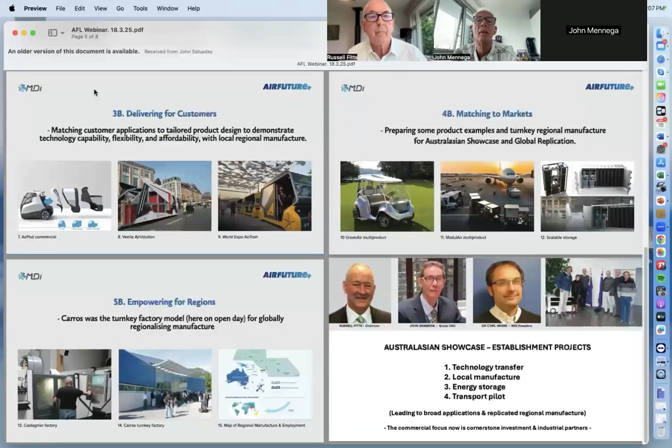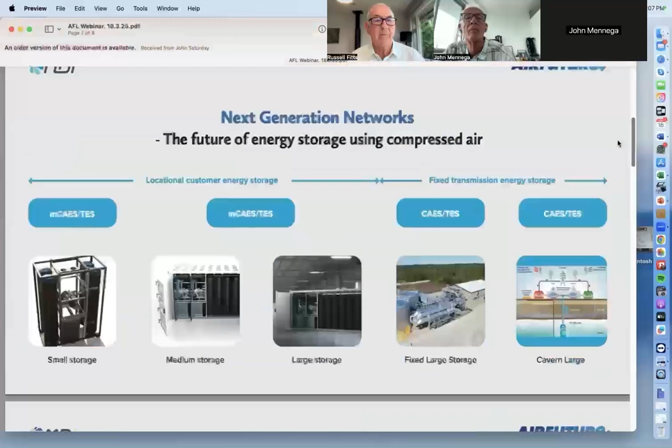Hi, everybody. Hold on, John, I'll just sort out the technology here. You've got a fair bit of echo now. What about if I turn the volume down a bit? At the moment, I've got all your slides up on one screen, which we do not want. Sorry, everybody, we'll be with you in a moment. I can start to talk anyway, Russell, while you're sorting that out. We're on slide 1. All good? We all good? Yep.

Everybody's experienced along the development gestation process with MDI, but I want to point out to you that the development has actually followed a very logical path, and explain a little bit to you why. Can you go back a slide, Russell? Explain to you why it's taken so long, back to the orange slide. Why it's taken so long, why we're now ready, and for further field development.

Some of you might recognise this slide as being the front page of the website. If you look up the top there, you'll see documents, fourth from the right. If you go to that over the course of the next week, you'll find copies of everything we're talking about, including the slides, the flyer, and the main document. Those documents differ to the others because they're focused on commercialisation.

Now, when we say on the website we're a universal alternative to batteries, we're not kidding. Batteries have a number of issues, including cost, safety, they degrade and they're not clean. But the primary issue about batteries that a lot of people don't realise is that they're shorter duration and they don't have high capacity, which means that if you spend $100 million on a 100 megawatt battery, it's probably got about 4 hours of scope, or its catchment area.

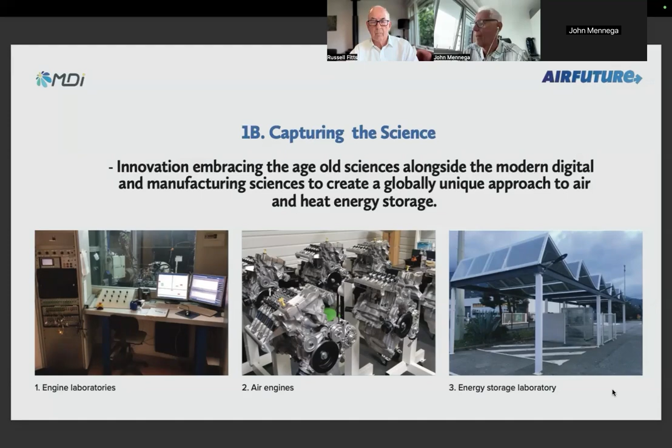And they did this via their laboratories in France. And it took a long time, and they worked along with Tata and others, etc. And you can see the engine laboratories on the left, all the different engines they were able to create, and the storage lab on the right-hand side. And that was the beginning of MDI, where they laid the platform for the next stage, and the next stage was product. Next slide, please, Russell.

And here MDI was able to evolve the technology that they had developed with the modularity, in other words, how you can make it bigger or smaller and still do exactly the same thing for the customers and the users. And also they created something which is totally unique to the energy industry. Within the one system, and a battery is an example of a system, they were able to separate out the capacity and the size to the actual storage and the energy generation. For any technical people within the audience, that's the difference between kilowatts and kilowatt hours. In other words, how much energy you store versus how you deliver that energy are completely able to be separated.

And that has enormous impact for being able to address all the different areas within the grid. And they're able to control all of that through the air valve system of the energy tanks. Now, bearing in mind that those tanks can be put underground a little bit like in the old fossil fuel service days, or current days still, the ecology of the system and the attractiveness of the system, let alone the scale of the system, is something that we really refer to as next generation.

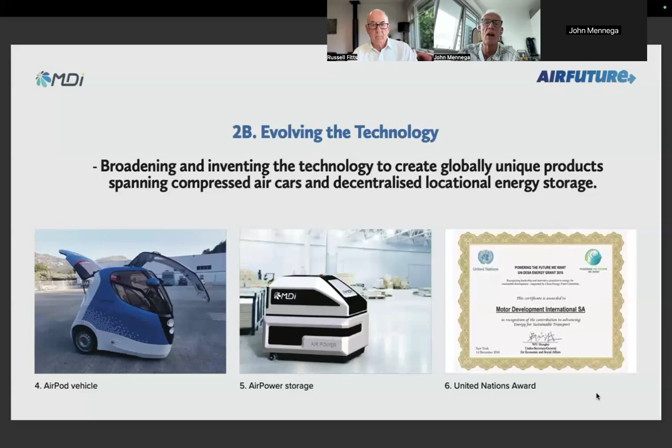It's one thing to develop the science and capture it as your platform technology. It's another thing to then produce products, and another thing again to deliver products for customers. This was the next stage of MDI.

Bearing in mind, while this is taking place, the years are ticking over because this takes a long, long time to do. The middle company there, Veolia, the huge European waste company that's all around the world, became a customer of theirs for that particular unit that you can see on the screen, which is still on the streets. What stage is it at? It now needs larger engines.

This is a step that we will be doing in early stages of the commercialisation. On the right-hand side, you see what became the very famous World Expo air train, which is the MDI train that was produced and commissioned by the World Expo to run their people around the Dubai World Expo. On the left-hand side is a complete contrast, showing how the AirPod is able to be adapted for commercial applications.

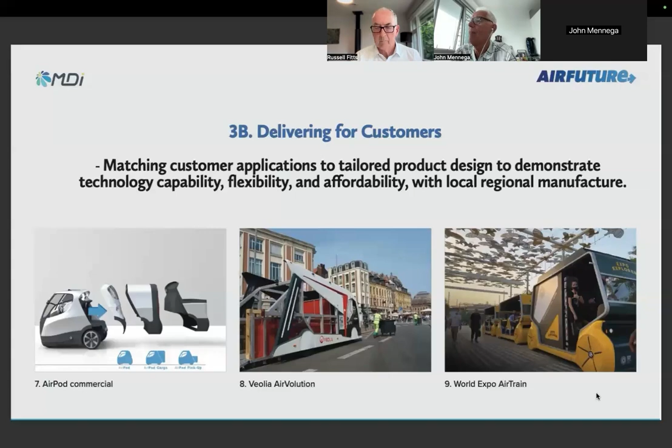What MDI and Air Future in collaboration are now saying and realising is that with the problems being experienced with batteries, energy storage, and the shortcomings in electric vehicles, the market is enormous. It ranges from things like the left-hand side of this picture, 4B the GreenAir, an example of a small compressed air product, to what we call the ModulAir, a larger product that was developed in the aftermath of the air train as a larger commercial vehicle, to the right-hand side where you've got small, medium, large, whatever storage you require, that can be added to all different elements of the grid, including homes, rooftop solar, communities, industry, microgrids, virtual power plants.

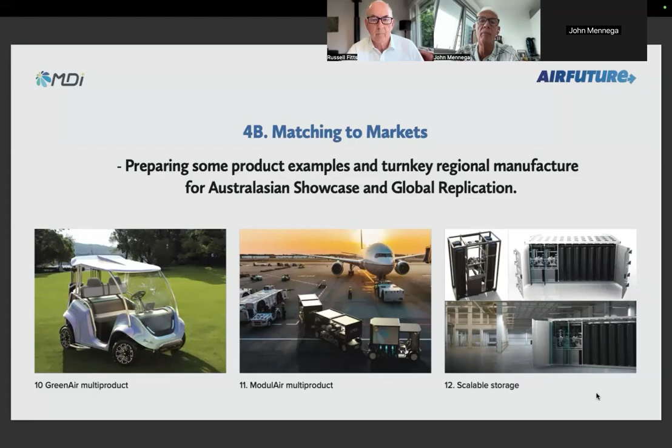The last quite earth-shattering capability that we have is decentralized manufacturing. In other words, we manufacture in regions. Quite likely where you are as the audience, we would be able to come and manufacture. Why can we manufacture regionally?

Because of the nature of our technology, but also because we have the flexibility to outsource—Russell will talk more about that—versus creating factories. We are completely flexible and completely modular.

You will see the factory on the left-hand side that created the AirPods, the factory in the middle that created the development, and the objectives we have for Australasia on the right-hand side, to create factories able to produce our product within the country.

Many of you will know this is exactly what the USA and Donald Trump are trying to achieve: more manufacturing. He's not the only one, because Australia is very keen to create more localized manufacturing, and we have the capability to do it—yesterday.

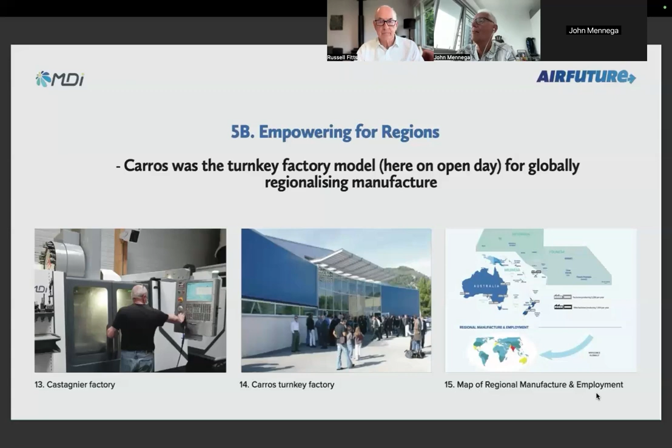As the final slide, we take you forward to the next stage. In this picture, which is now quite old, we had already started negotiations with MDI—Cyril Negre on the right, that tall fellow being John Mennega, and that other handsome fellow second from the right being Russell Fitts. We started those negotiations quite some time ago.

But we are low on resources. We have Russell, John, and Cyril, but with the restructuring of MDI, we are now rebuilding that pack. What we're doing moving forward to commercialisation is focusing on four specific projects that Russell will talk about: technology transfer, local manufacture, energy storage, and the transport pilot.

My closing comment is that I come from the investment banking industry and understand finance and investment. We've been delayed until this point in seeking cornerstone climate and innovation investment from a large perspective, but we're not delayed anymore. This is the exercise we're undergoing right now, which we can talk about in a further seminar or newsletter, because I'm going to hand over to Russell now to take the running with the commercialisation stages for Australasia. Russell, over to you.

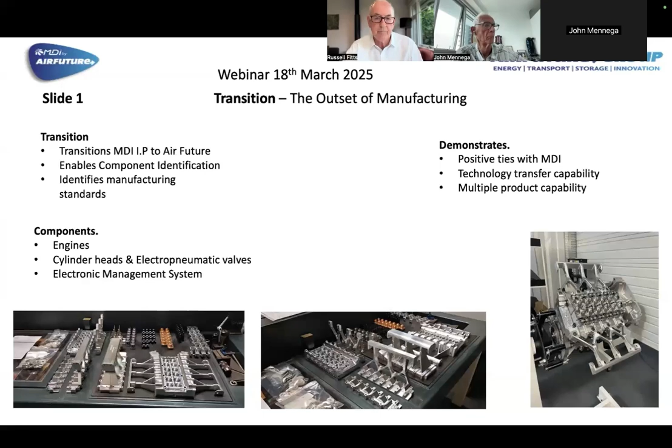Manufacturing pilot consists of two projects: energy and transport. There are two engines selected by MDI. The smaller one is a two-cylinder 10.4 kilowatt diesel engine, a Yanmar product. Then there's the three-cylinder 0.9 litre 109 horsepower Renault engine and the Smart Fortwo Brabus, the engine we're familiar with because it was used as the bottom engine in the Expo Explorer.

The Yanmar engine will be used in the Green Air Golf and the AirPod, and also for smaller scale electricity generation and storage, around the 7 kilowatt range, so we're looking at domestic. But one advantage against batteries of the MDI technology is that it can be boosted. The normal revs for these engines is about 1,500 revs per minute, but by increasing the revs to 2,500 to 3,000 revs, you can boost the output of the generators. So you've got 7 to 12 kilowatts being the range for the Yanmar engine.

With the Smart Fortwo engine, which you're again familiar with from the Dubai Explorer, it will be used in the Modul'Air orders. In the energy and energy storage projects, it's a 21 kilowatt alternator generator, which can be boosted, significantly, to 42 kilowatts and even up to 52 kilowatts. Now the range for delivering 52 kilowatts from batteries could cost $70,000. We can do that, or intend to, with one engine.

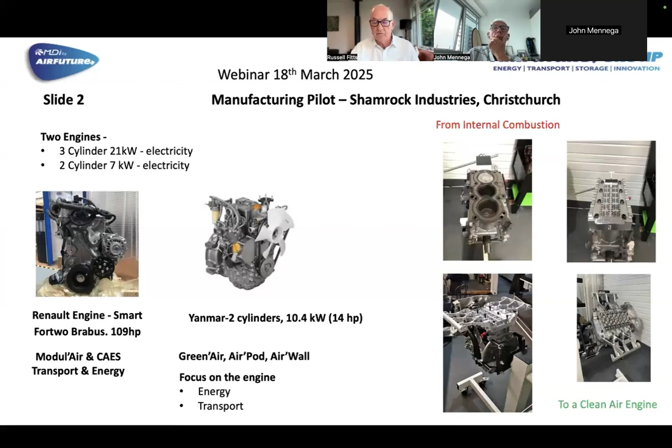Our energy pilot demonstrates the practical, real-world application of our technology, showing its potential across a variety of industries.

One core technology can provide multiple benefits, including electricity generation, energy storage, heat and cold integration, and the ability to use biofuels like methane, enhancing sustainability.

We've chosen a path that offers the greatest advantage and is cost-effective to implement, which is the dairy industry. The dairy industry requires electricity for hot water, refrigeration, running their plants, and irrigation. They produce biofuels via effluent.

Farmers create a network management headache for lines companies by multiple farmers turning on their plants at the same time, and not to mention quality of electricity dropping below acceptable levels, causing potential damage to electrical plant, which is a significant concern for farmers. The farmers require energy storage to overcome these issues.

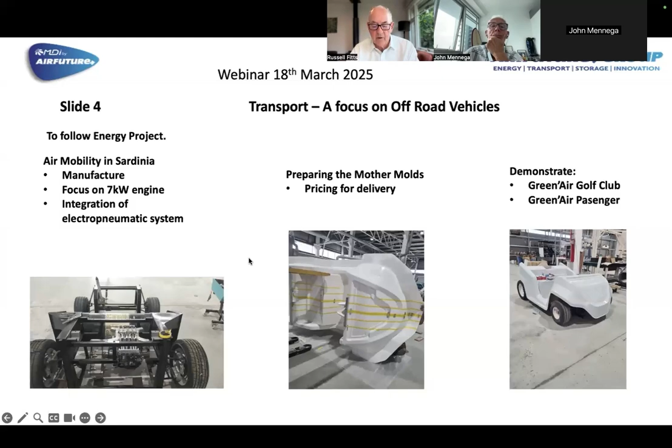We are seeing good progress with Air Mobility, but with additional funding for us, we could advance that even further.

Heat expansion and energy loss recovery. Now, the implications of our energy project are that we'll be able to demonstrate a game changer with global implications.

Firstly, capturing compression heat and expansion cold and converting it to usable energy provides real advantage for compressed air usage. Of course, prior to this, that has been wastage, and that has worked against the operational acceptance of compressed air as a source of providing solutions.

So looking at the process of heating and cooling as a system, as against single use, is essential to our commercialisation. Additionally, the implications of expanding compressed air prior to the engine, through a simpler inline burner placed between the storage tank and the engine, can increase air volume and efficiencies towards 70%.

Shareholders will be familiar with us talking about that when we look at the mileage predictions for the AirPod: 110 kilometres on air, and up to 320 when we use heat. But within the dairy industry, for example, or any industry where you've got a biofuel, it is hugely significant.

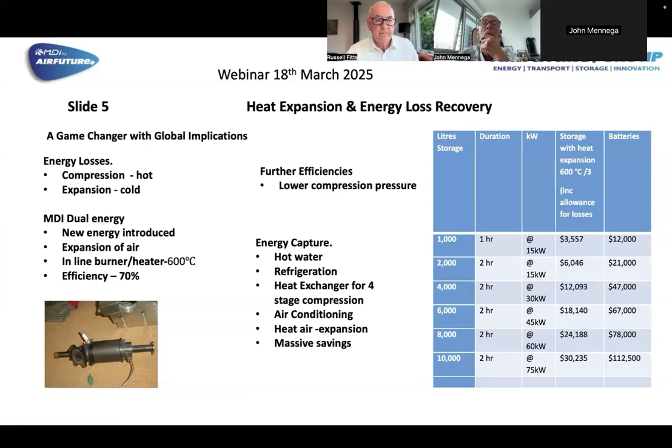So, takeaways and the final call. The message is simple: we require support for our opportunity. We have a disruptive technology with multiple significant advantages—technical, manufacturing, and ecological.

We've established a clear path to commercialisation, and our products can be replicated globally, expanding the potential for growth in international markets. The partnership with MDI strengthens our position and will allow us to help advance the technology on a global scale. For investment, the path ahead is a game-changing opportunity, and it's a timely one.

Once we've achieved key funding milestones, the opportunity for new investors to join at this valuation will be limited. We're seeking investment for working capital at the same time as project funding, which will drive the next phase of our growth. It's a chance to get involved before the company accelerates, securing your stake in a growing, future-proof business.